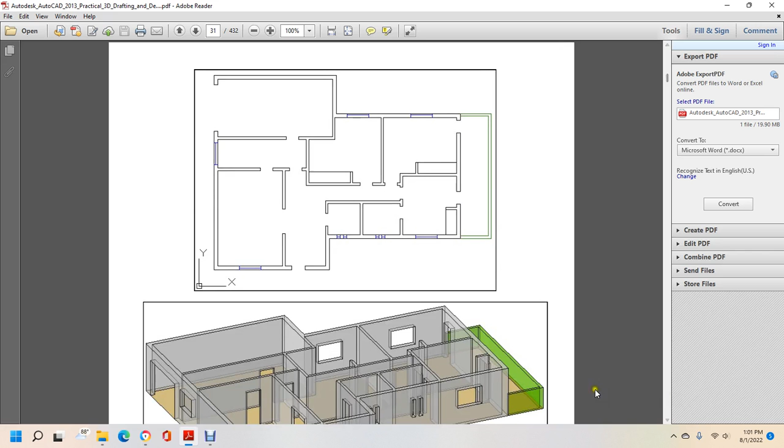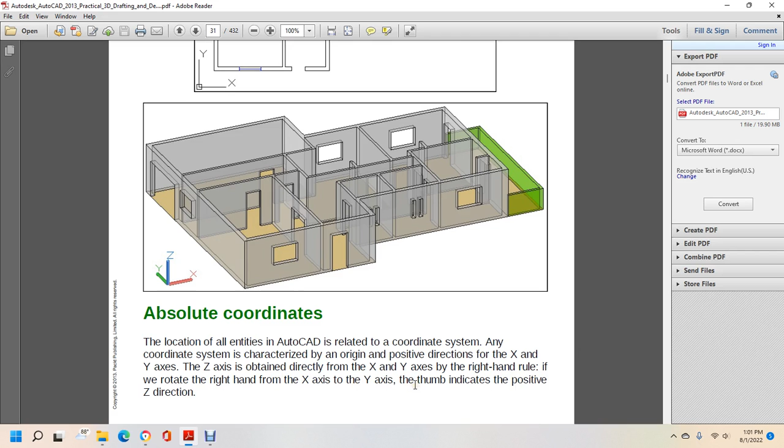Alright, this shows a floor plan extracted. Absolute coordinates locate any point in AutoCAD related to the coordinate system. Any coordinate system is characterized by the origin and the positive direction for the X and Y axes. The Z axis is obtained directly from the X and Y axes using the right hand rule: if you rotate the right hand from the X axis to the Y axis, the thumb indicates the positive Z direction.

When prompting for a point, besides specifying the location in the drawing area with a pointing device such as the mouse, we can enter the coordinates using the keyboard. The format for absolute Cartesian coordinates is related to the origin, defined with the values of three orthogonal coordinates, x, y, and z, separated by commas: x coordinate, y coordinate, z coordinate. The z coordinate can be omitted.

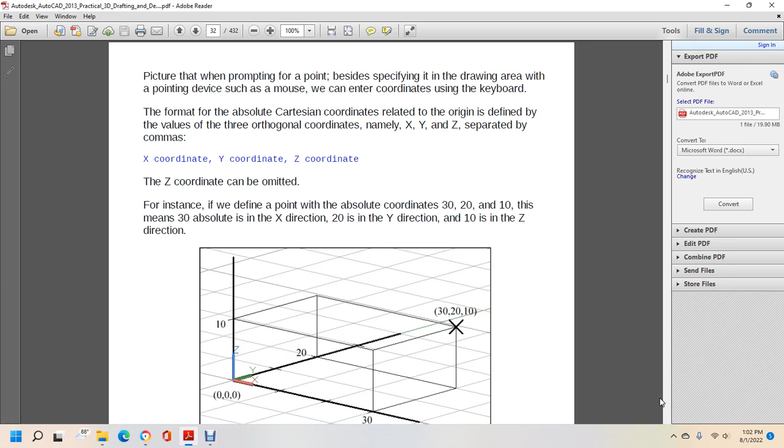For instance, we define a point with the absolute coordinates 30, 20, and 10. This means that 30 is in the x direction, 20 is in the y direction, and 10 is in the z direction.

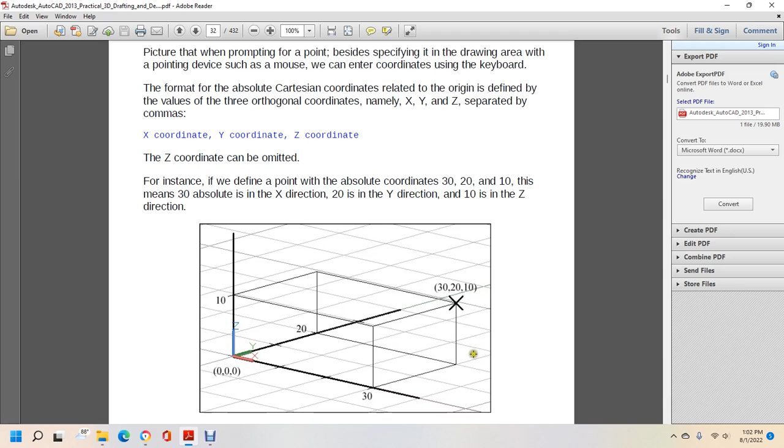Relative coordinates: frequently we can specify a point whose coordinates are related to the previous point. The format for relative Cartesian coordinates is defined with the at symbol, followed by the increment values of the three directions separated by commas: at x increment, y increment, z increment. Of course, one or more increments can be zero.

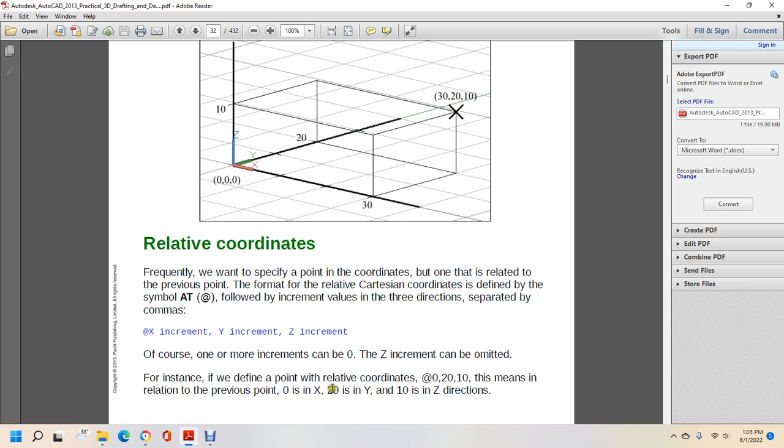The z increment can be omitted. For instance, to define a point relative to the coordinates at 0, 20, 10, this means the relative point is 0 in x, 20 in y, and 10 in the z direction.

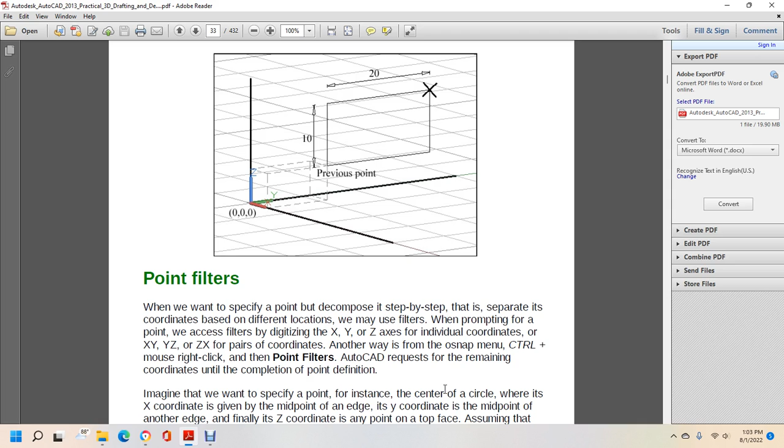Point filters: when we want to specify a point, we can decompose it step by step, separating the coordinates based on different locations, using filters when prompting for the point. We access the filters by typing x, y, z for individual coordinates, or xy, yz, and zx for pair coordinates. Another way is using control plus right click, then selecting point filters. AutoCAD then requests the remaining coordinates until the point definition is complete.

Imagine you want to specify a point, for instance the center of a circle, where the x coordinate is given by the midpoint of one edge, the y coordinate is the midpoint of another edge, and the z coordinate is any point on the top surface, assuming the midpoint OSNAP is predefined. The dialog should read: command, specify center point, at x of the midpoint edge, y at the midpoint edge, any point on the top surface, specify radius circle value.

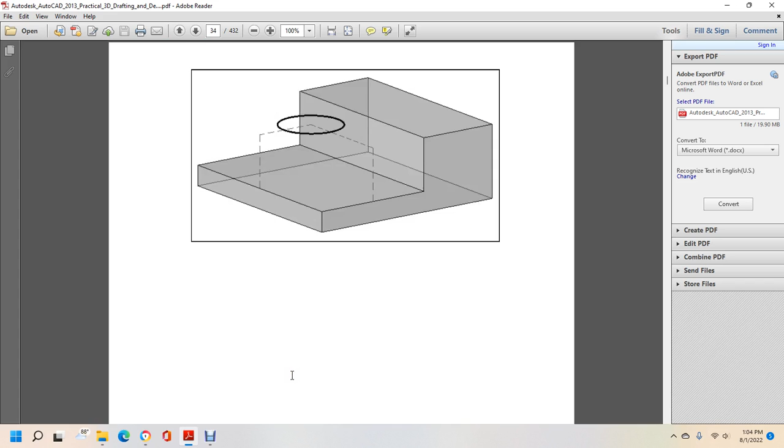Then we have this neat little circle here.

Workspaces: AutoCAD comes with a selection of workspaces. We can choose the workspace, for example the classic environment versus the ribbon, and change the workspace by picking the workspace switch button on the status bar.

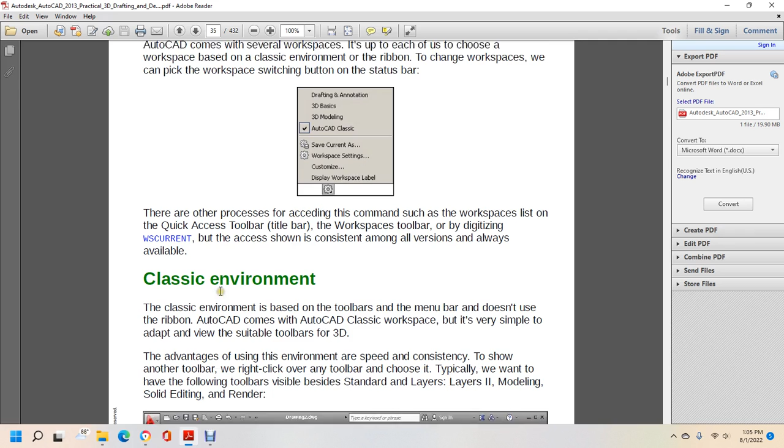The classic environment is made of the toolbar and the menu bar and doesn't use the ribbon. AutoCAD comes with the AutoCAD Classic workspace, but it is very simple to adapt and view with the suitable tools for 3D.

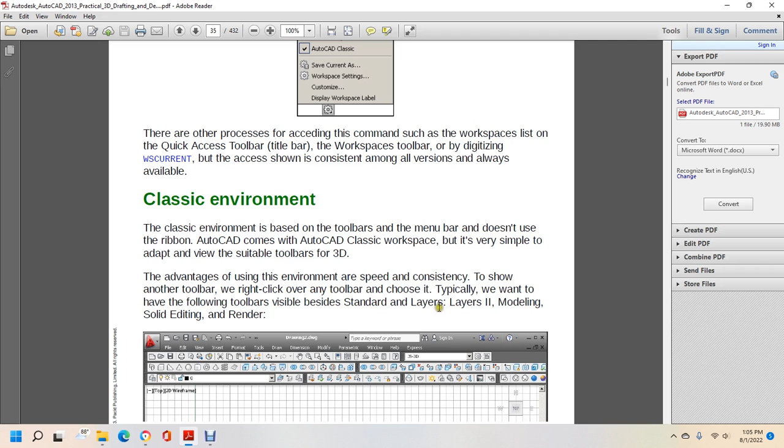Advantages of the environment: speed, consistency. To show another toolbar, right click over any toolbar and choose it. Typically we want to have the following toolbars visible, besides the standard: Layers, Layers 2, Modeling, Solid Editing, and Render. Now let's show the ribbon environment.

Since 2009, AutoCAD also allowed the ribbon-based environment, normally used with neither toolbars nor menu bar. AutoCAD comes with two ribbon workspaces, namely 3D Basics and 3D Modeling, the first being less useful than the second. The advantage is consistency with other software, and the commands are divided into panels and tabs.

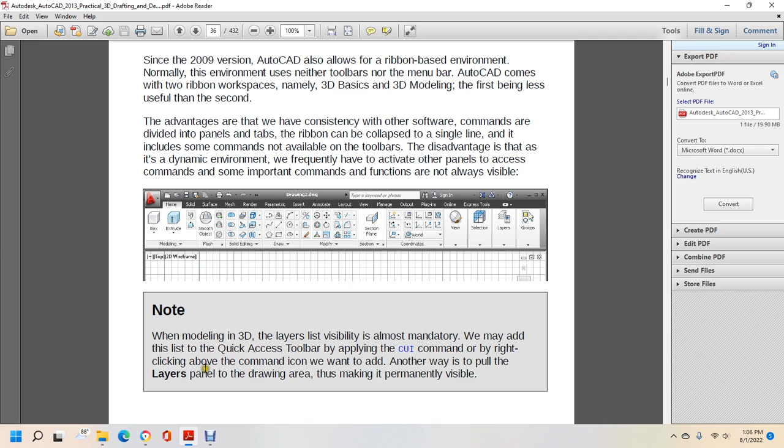When modeling in 3D, layer visibility is almost always mandatory and may be added via the quick access toolbar by using the CUI command, or by right clicking above the command icon you want to add. Another way is to pull the layers panel into the drawing area to make it permanently visible.

Correct layer application is fundamental in 2D, and in 3D it assumes extreme importance. Each type of 3D object should be placed on its proper layer, using the control of name properties. A good practice is not to mix 2D objects with 3D objects on the same layers, so 3D objects must be easily identified, for instance by adding a 3D prefix.

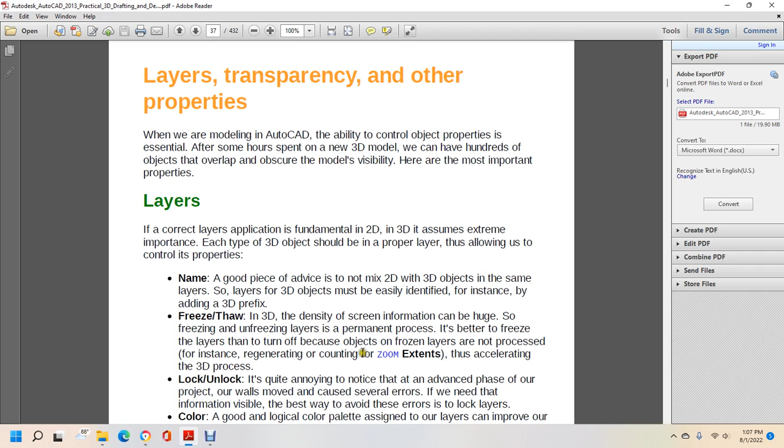For instance, regenerating, counting for zoom extents are accelerated in 3D by freezing layers. Lock and unlock: it's quite annoying to notice, at an advanced phase of the project, that walls moved and caused several errors needing information to be visible. The best way to avoid this is to lock the layers.

Color: a good logical color palette assigned to the layers can improve our understanding of the model. Transparency is the way you want to see through walls or other objects during the creation process, and may be given a value of 0 to 90% as the layer's transparency.

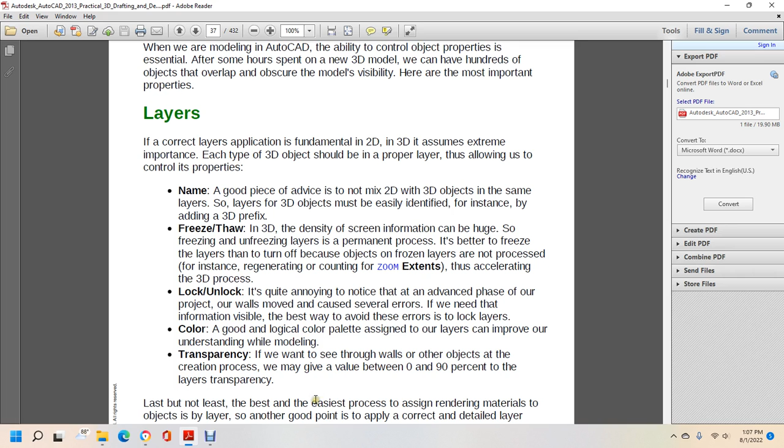Last but not least, the easiest process is assigning and rendering a material to objects by layer, another good point being to apply a correct and detailed layer scheme.

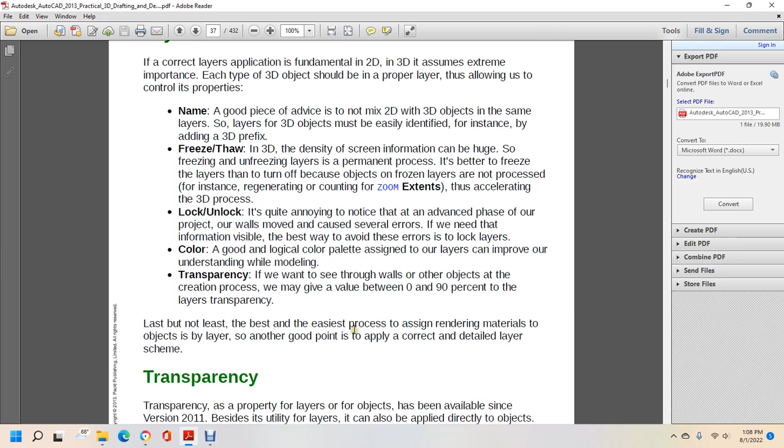Transparency is a property of the layers, and objects have had it available since the 2011 version. Besides the layer utility, it can also be applied directly to the object. For instance, we may have a 3D slab.

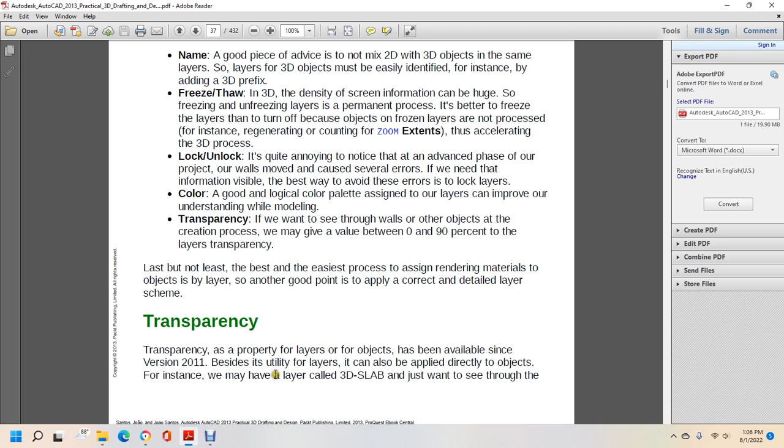If we just want to see through the upper slab, we change the object's transparency property, or press Control+1 to see the transparency in the drawing area with the TPY button. Transparency is used with the TPY command, and on the ribbon and status bar it must be turned on.

All objects not selected become invisible using the Isolate Objects command. Hide Objects: the selected objects become invisible using the Hide Objects command. Object Isolation: all objects are turned back on using the End Object Isolation command.

There's a small lamp icon in the status bar, the second icon from the right. If this lamp is red, it means there are hidden objects; if it is yellow, all objects are visible.

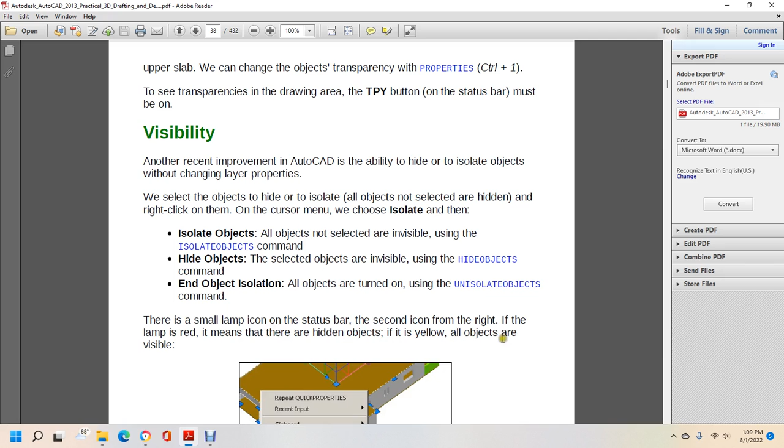Shown in the following image: application of transparency and hide objects on the left wall and the upper slab.

Auxiliary tools in AutoCAD software are very precise with the correct application. It is a key factor for good projects, all users should be familiar with the Ortho and OSNAP tools, and the following application for these auxiliary tools.

The 3D project is complemented with the first exercise using OSNAP, Ortho, Polar, and O-Track auxiliary tools. Let's start with object snapping, the most frequently used tool for precision.

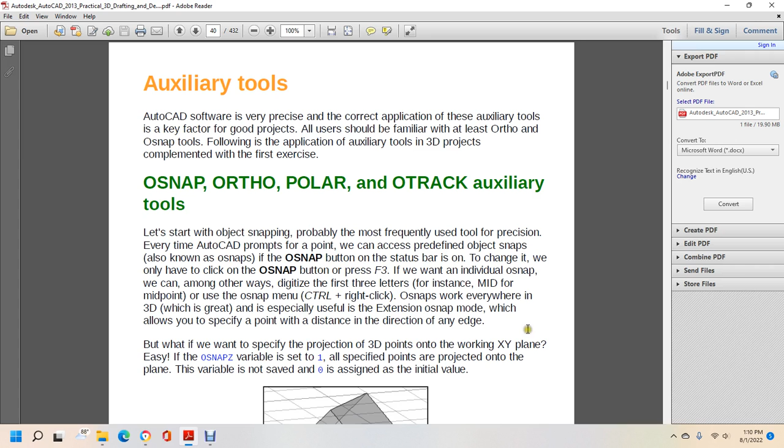OSNAPs work everywhere in 3D, which is great, with special use of the Extension OSNAP mode, which allows you to specify a point by distance, direction, and any edge. But if we want to specify the projection of 3D points onto the working XY plane, the OSNAPZ variable is set so we can also specify points or project them onto the plane.

The variable is not saved; AutoCAD assigns it an initial value.

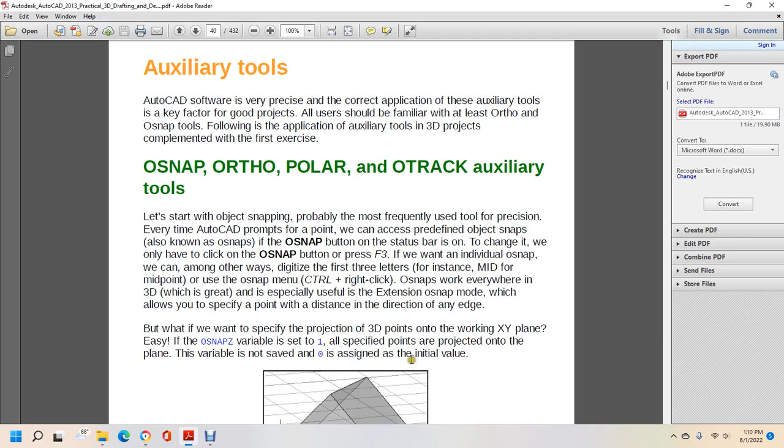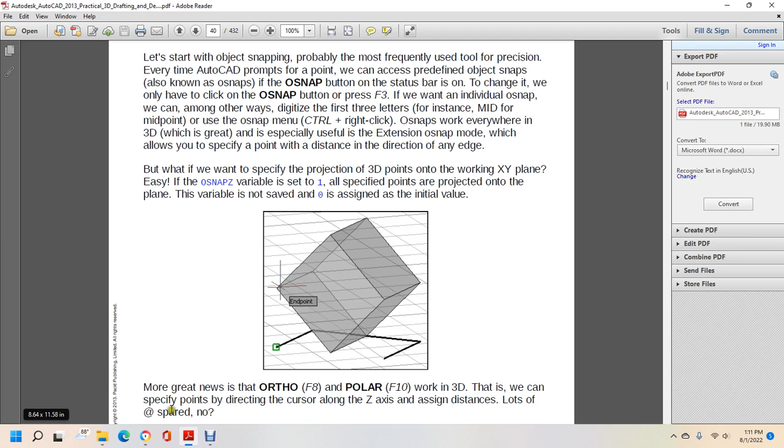The great news is that the Ortho F8 key and Polar F10 key also work in 3D. That means we can specify points by directing the cursor along the Z-axis, assigning distances using relative or absolute relative coordinates with the at sign.

O-Track, or F11, uses derived points from predefined OSNAPs, also working along the Z direction, which may pass over the OSNAP, creating a distance along each specific direction, obtaining a crossing point.

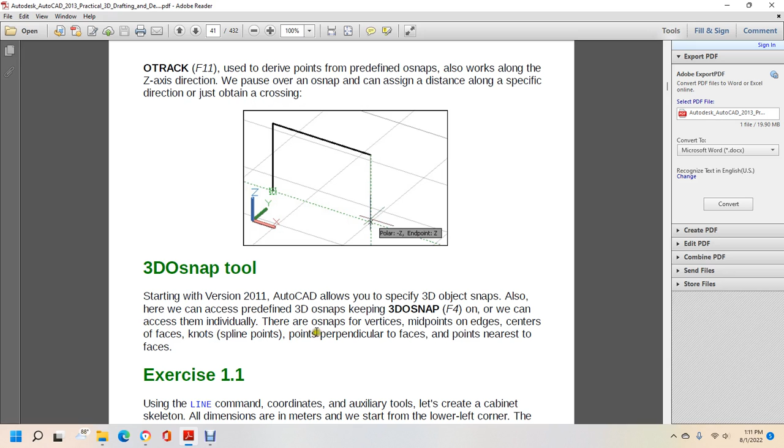3D OSNAP tools: starting with version 2011, AutoCAD allows you to specify 3D object snaps. You can also access predefined 3D OSNAPs with F4, where we can access individually vertices, midpoints of edges, centers, faces, knots, and spline points, as well as points perpendicular to the face and points nearest to the face.

Exercise 1.1: using the line command coordinated with auxiliary tools, we draw a cabinet skeleton. All dimensions are in meters. We start at the lower left-hand corner with the Ortho or Polar button on, along with O-Track and OSNAP buttons with endpoint and midpoint predefined.

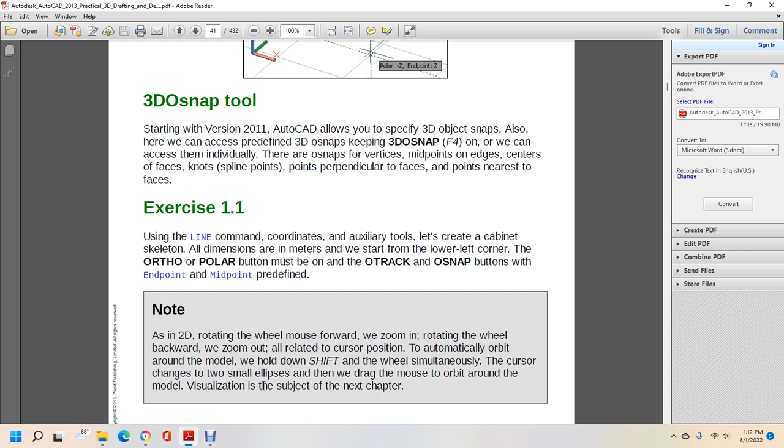Note that rotating the mouse wheel forward zooms in, and rotating it backward zooms out, relative to cursor position. The model automatically orbits when holding Shift and the wheel simultaneously, with the cursor forming a chain of two small ellipses; this lets you drag to orbit around the model. Visualization is the subject for the next chapter.

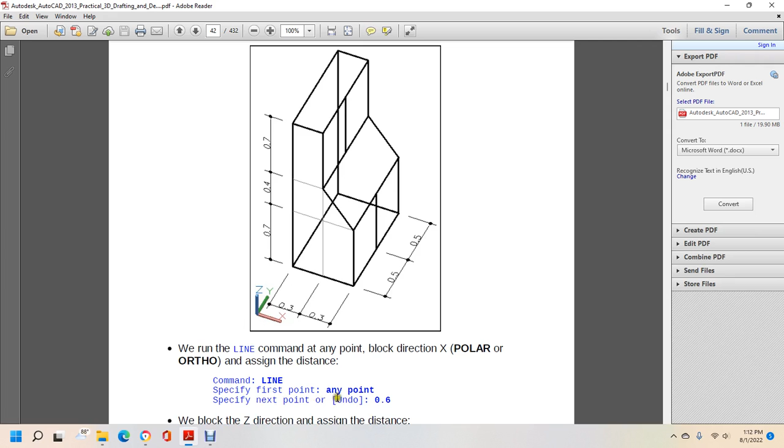We start running the line command with Polar or Ortho to block direction of the X axis and assign distances. At the command line: first point, any point. Specify the next point with distance 0.6, blocking the Z direction and assigning the distance. Specify the next point with distance 0.7.

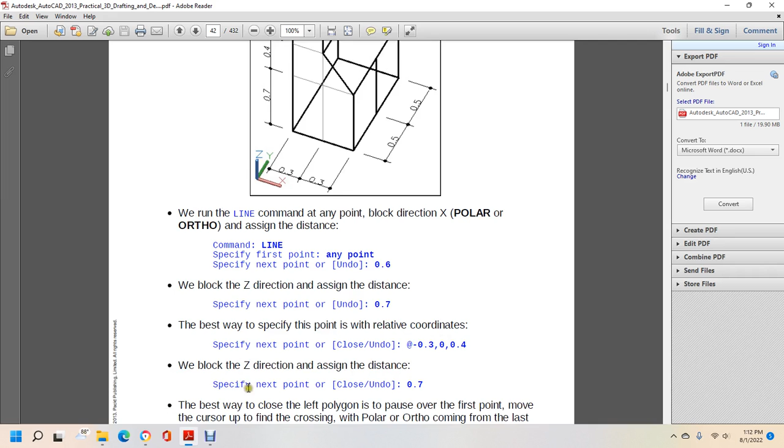The best way is to specify the point with relative coordinates: specify the point at @-0.3,0,0.4. We block the Z direction, assign the distance, specify the next point as 0.7.

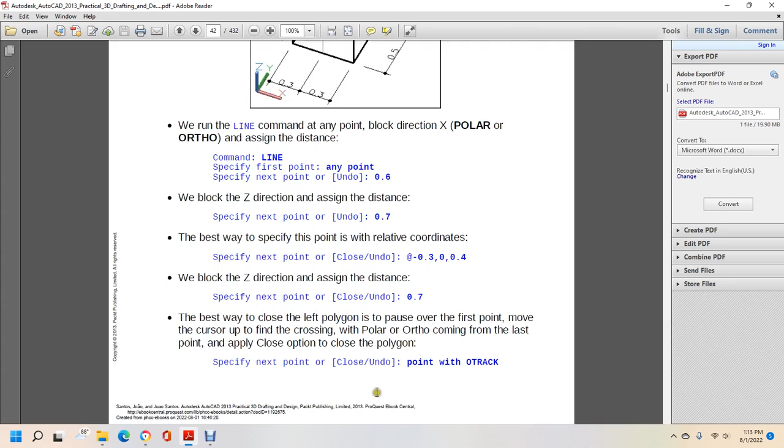The best way to close the polygon is to pause at the first point and move the cursor to find the crossing with the Ortho command, then apply the Close option to close the polygon. Specify the next point, then use Close or Undo with O-Track, and specify the next point, C for close.

We copy all the lines 1 meter in the Y direction. Command: copy. Select objects, specify opposite corner, select, enter to confirm current settings, copy mode multiple. Specify the base point with displacement mode, displacement point, specify second point of array using first point as displacement, specify second point of array, exit.

Undo, exit, and enter. We complete the cabinet skeleton drawing by drawing lines between the endpoints and midpoints using the line command.

Can everyday 2D application commands be used in 3D? Of course they can. We have already seen this with the line command and layer properties. Let's look at some examples, particularly with 3D applications.

Learning the known drawing commands, basically all drawing commands can be used in 3D, provided we have the correct current working plane set. The line command is an exception, since its endpoints can be anywhere, making it a true 3D command. Circles, arcs, and polylines, including polygons and rectangles, are drawn on the working plane, called the active coordinate system, or on a plane parallel to it.

Edit commands: here's a list of the most important editing commands that work the same way in 2D or 3D - erase, move, copy, scale, join, explode, and break. Some commands work only with the object's plane, but not necessarily the active working plane. Examples are fillet, chamfer, and offset.

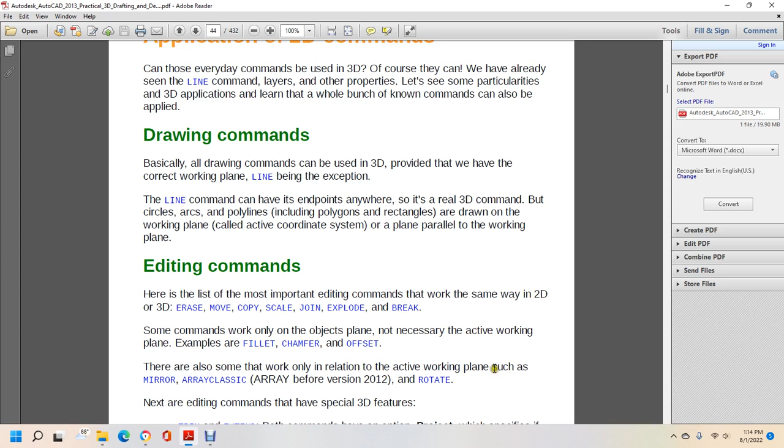There are also commands that work only in relation to the active working plane, such as mirror, arrayclassic - array before version 2012 - and rotate. Next, editing commands with special 3D features.

Trim and extend both have the option Project, with settings for the cutting or extending using a linear object, the current coordinate system, or the current view, allowing the cutting and extending of objects. In the current view they may seem to be on the same plane, but they are really on different planes.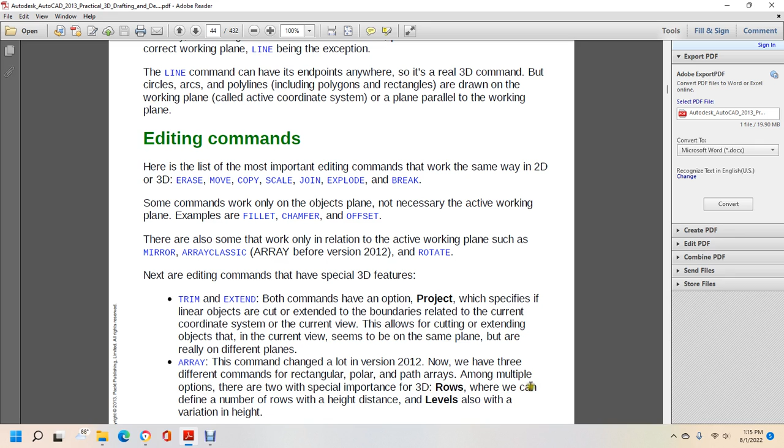The array command changed a lot in version 2012. Now we have three different commands: rectangular, polar, and path arrays. Among the multiple options, two are of special importance for 3D arrays, where we can define the number of rows, the height or distance between levels, and also a variation in height.

Okay, other inquiry commands. One can use AutoCAD for acquiring information. The distance command, DIST, allows you to obtain the 3D distance, including increments in X, Y, and Z, and the direction between two points.

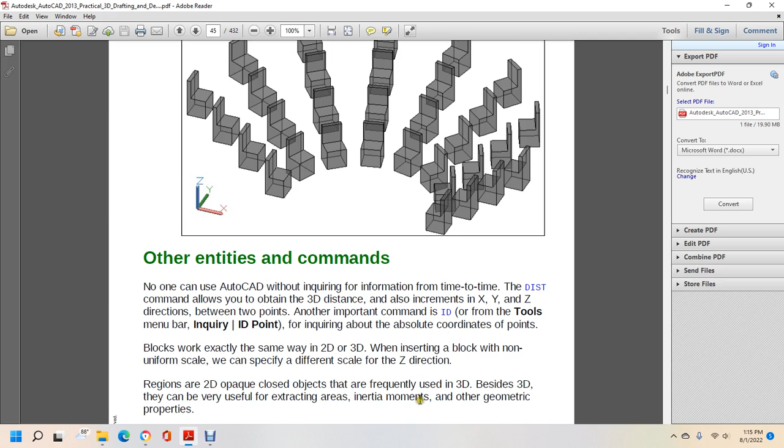Another important command is ID, found on the tools menu bar inquiry, for obtaining the absolute coordinates of a point. Blocks work exactly the same way in 2D and 3D. When inserting a block with a non-uniform scale, we can specify a different scale in the Z direction. Regions are 2D opaque closed objects, frequently used in 3D, useful for extracting areas, inertia moments, and other geometric properties.

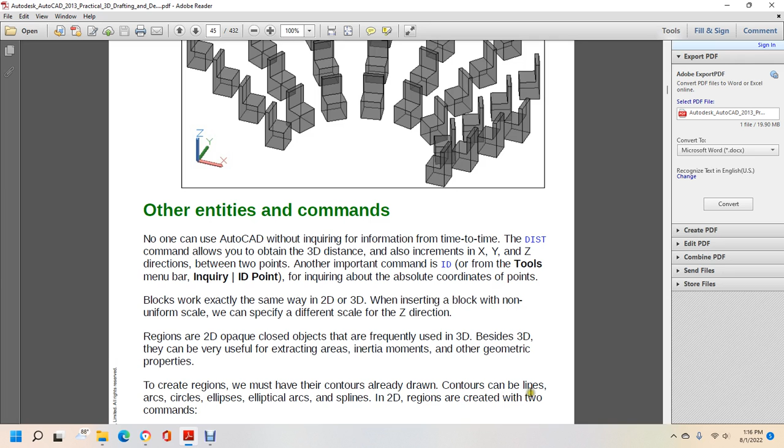To create regions, we must already have the contours drawn. Contours can be lines, arcs, circles, ellipses, elliptical arcs, and splines. 2D regions are created with two commands. The region command, alias REG, creates a region from a closed object or a set of linear objects with a defined closed boundary, prompting only for selection of objects; by default the original objects are deleted.

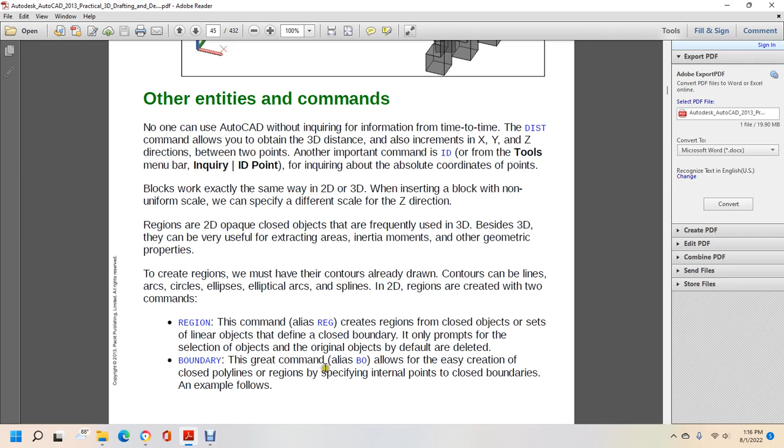Boundary: the boundary command, alias BO, allows easy creation of closed polyline regions, from polylines or other objects, by specifying internal points within closed boundaries.

An example follows. Alright, exercise 1-2: we're going to create 2D objects and derive a set of regions from them. Start AutoCAD and create 2D linear objects similar to those shown in the following image.

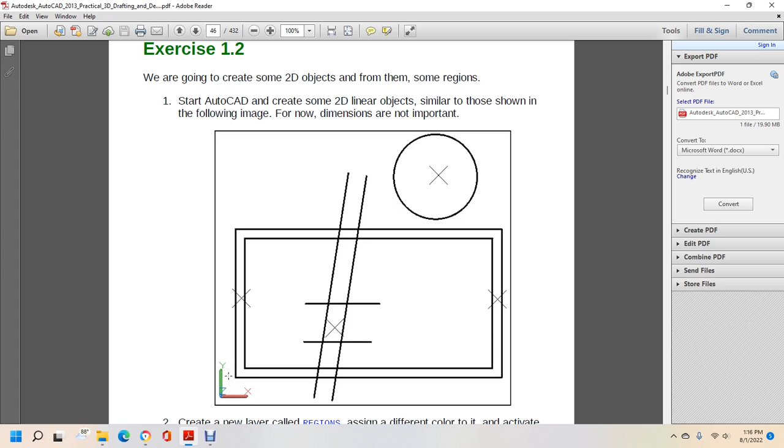The exact dimensions are not important. Create a new layer called regions with a different color, activate it, and run the boundary command, alias BO. In the dialog box showing object type, select regions, then specify pick points; once the dialog box disappears, specify four points inside the closed areas shown in the image and press enter so that four regions are created. Freeze layer 0 to view only the regions.

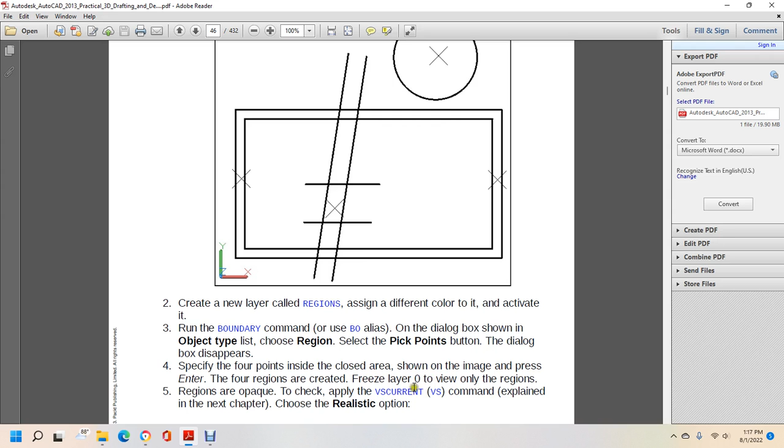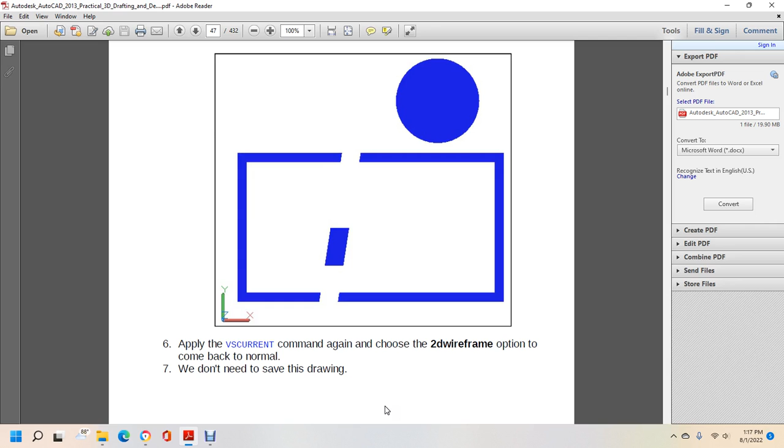Regions are opaque; check this by applying the VSCurrent command, explained in the next chapter, to achieve the realistic visual style option, and apply VSCurrent again to achieve the 2D wireframe option to return to normal. We do not need to save this drawing.

Alright, linear 3D entities. We can apply thickness to most linear 2D entities, but we can also create linear 3D entities like 3D polylines and splines. Thickness: almost all linear entities have a known 2D property called thickness, whose value represents the height along the Z-axis.

A better word actually should be height. This 3D feature is allowed with AutoCAD LT, and can be applied to text made with a text style using an SHX font.

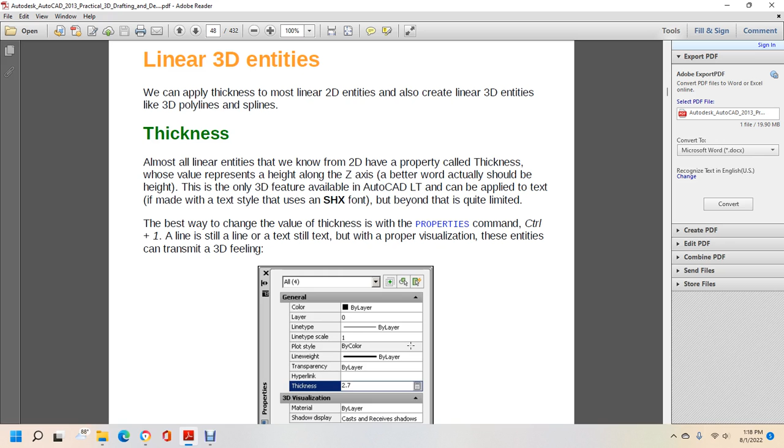Beyond it is quite limited. The best way to change the value of the thickness is the PROPERTIES command, Control+1. A line is still a line, a text is still a text, but the proper visualization of these entities can transmit a 3D feeling.

The process is available with the 3D POLY command, alias 3P, created for 3D polylines from the start, which works like the LINE command but results in a single object.

First, the object must already be a 3D polyline. Note, starting with version 2012, the best way to apply the JOIN command is to select all line segments at the first prompt without specifying a source object. Depending on the type and position of the selected objects, the most suitable object is automatically created.

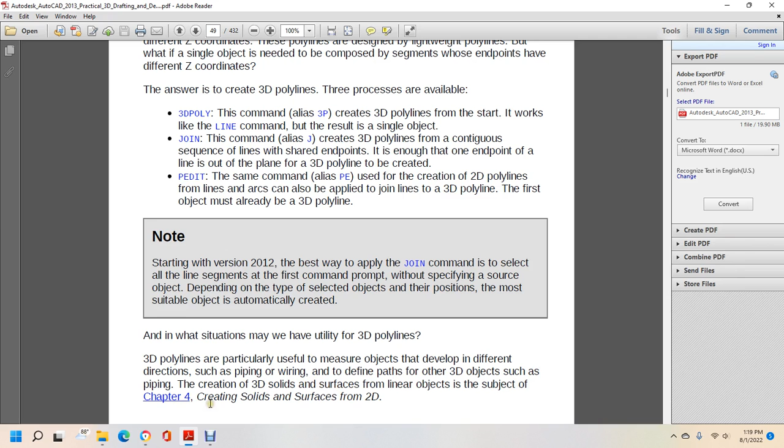In which situations may we have utility of a 3D polyline? 3D polylines are particularly useful for measuring objects that develop in different directions, such as piping or wiring, to define paths for other 3D objects such as pipes, and for the creation of 3D solids and surfaces from a linear object, a subject of Chapter 4, creating solids and surfaces from 2D.

Splines and helixes. The spline and helix are smooth, linear objects normally without corners that pass through or near specified points. The term spline is short for non-uniform rational B-spline, or NURBS. Splines are described by a set of parametric mathematical equations.

Have no fear of AutoCAD, it will internally deal with this and we will not have to. Splines are used whenever we need smooth curves, also forming the foundation for non-uniform rational B-spline surfaces used in automotive and aeronautical projects.

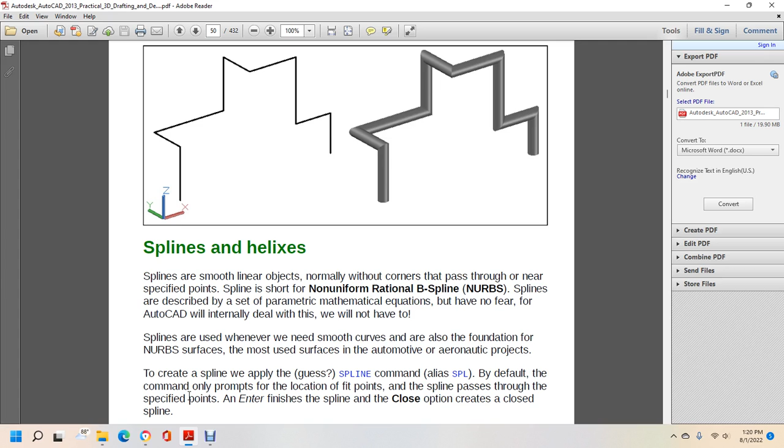To create a spline, we apply the SPLINE command, alias SPL. By default the command only prompts for the location of the fit points, and the spline passes through the specified points. Enter finishes the spline, and the close option creates a closed spline.

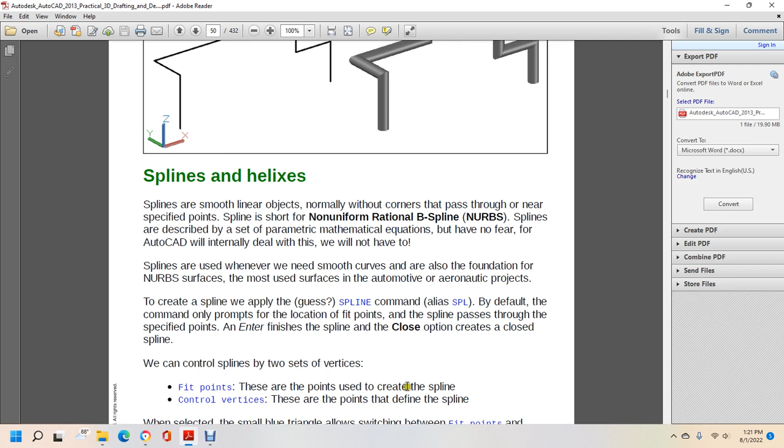We can control the splines by two sets of vertices: fit points, which are points used to create the spline, and control vertices, which are points that define the spline. When selected...

...with a small blue triangle, that allows you to switch between fit points and control vertices within the edit of the spline. Editing a spline is very simple - select without a command and work with the grips, either clicking the grip or moving it, and we can hover the cursor over the grip to see a grip menu.

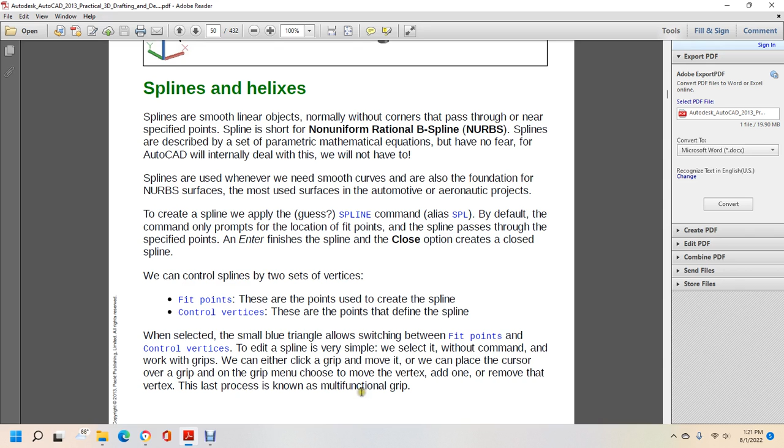Choose to move the vertices, add one, or remove vertices. The last process is known as the multifunctional grip. I show what fit points are, then control vertices, then the multifunctional grip, which comes with stretch point, add fit point, and remove fit point.

Note, the AutoCAD 2012 JOIN command is also a great tool for the creation of a complex spline, allowing us to combine a non-planar sequence of lines, arcs, elliptical arcs, and splines into the result of a single spline. The HELIX command lets us create a 2D or 3D helix, a spiral.

By default the command prompts for the center point, the base radius, the top radius, and the height. With the options we have the position of the axis endpoint, the number of turns, the height of one complete turn, and the twist of the helix, clockwise or counterclockwise direction.

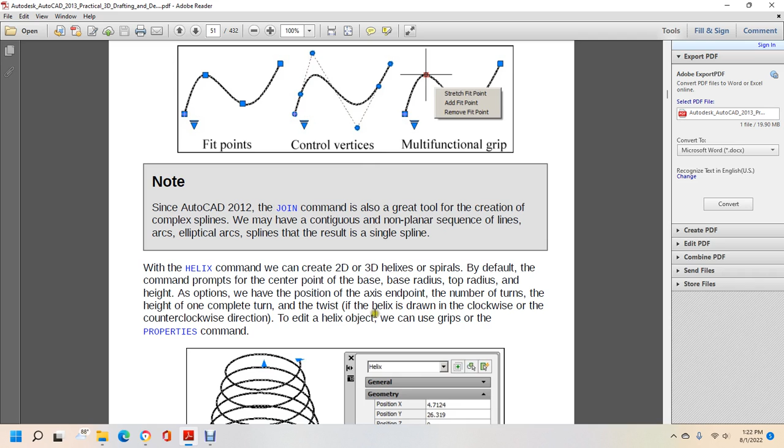To edit a helix object, we can use the grip or the properties command. It shows the helix command, and then the number of turns, turn height, base radius, top radius, twist, turn slope, and the X, Y, and Z positions, constrain and height.

If we explode the helix, the result is a spline. The blend command, new in version 2012, creates a special spline that connects two open linear objects.

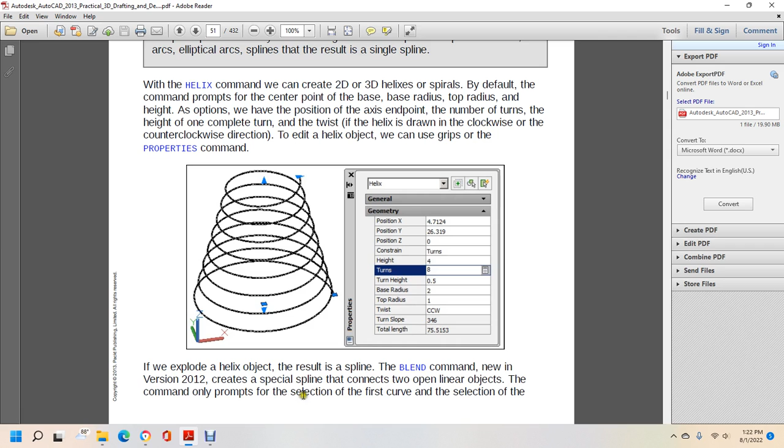Only prompts for the selection of the first curve and the selection of the second curve. Selections must be near the endpoints to connect, with the continuity option.

This allows a choice for the continuity applied: tangent continuity, known as G1, or smooth curvature continuity, known as G2.

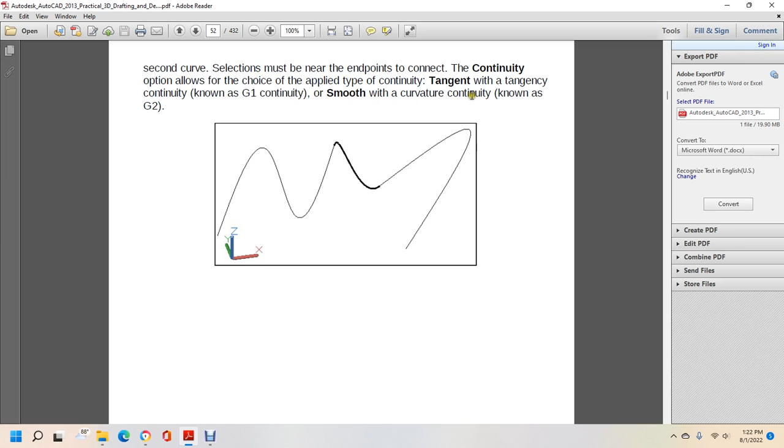Alright, how to create great 3D models. Here are several possibilities, starting with a 3D project. We created the 3D project from a complete set of 2D drawings with all the necessary viewpoints included.

The keyword is planning. First, we have the careful planning of the work instead of immediately starting with the model, but it's better, and less time consuming, to decide the drafting sequence and tasks.

Have I created the needed layers, and other definitions, layouts, styles, and so on? Am I going to use external references in the project?

Do I have all the necessary information? If we have the 2D drawings, these must be carefully studied, especially to check for any inconsistencies between the views, and how to start.

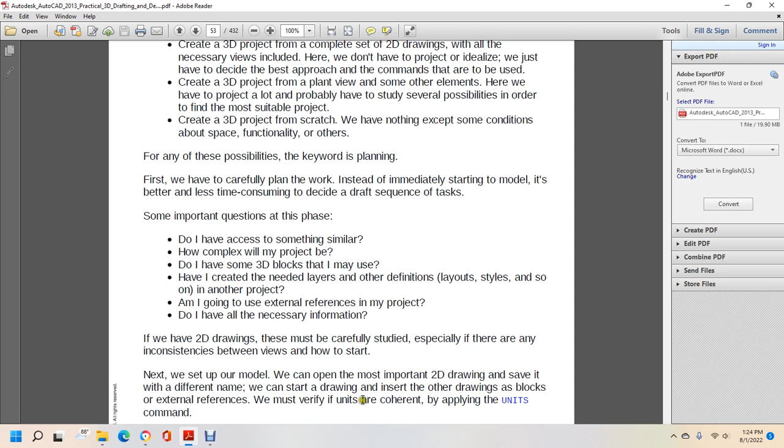Next, we set up the model. We can open the most important 2D drawing, saving it with a different name. We can start with the drawing, insert the other drawings as a block or as an external reference, and verify that the units are coherent, applying the units command.

Continuing the setup, we create layers and other definitions with the needed commands. Here is ADCENTER.

It's also named the Design Center, Control plus 2. This allows you to gather all layers, blocks, or other definitions from other drawings without opening them.

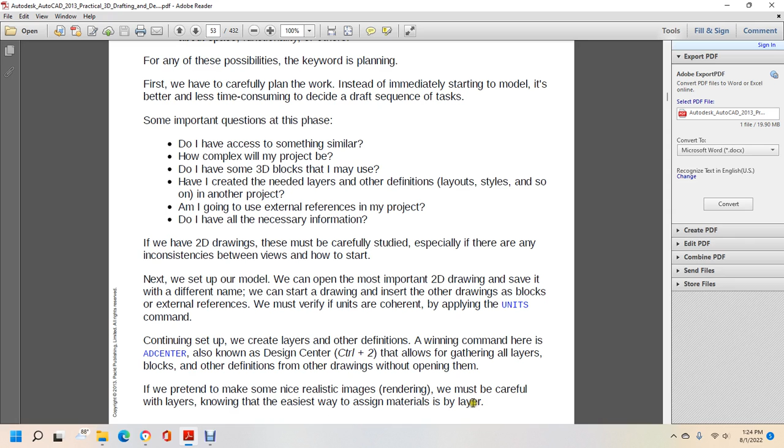If we intend to create a nice, realistic rendering image, we must be careful with the layers, knowing that the easiest way to assign materials is by layer.

Keep several versions of your project for the important steps achieved. You must save backups to revert if you change your mind about a step, and if the current file is corrupted, it will minimize the loss.

Summary. In this chapter, we introduced 3D, the importance of the third coordinate, the input of points, absolute and relative coordinates, the application of point filters, the Analyze workspace, and how to control the AutoCAD environment: layers, transparency, and other properties.

Alright, Chapter 2, Visualizing 3D Models.